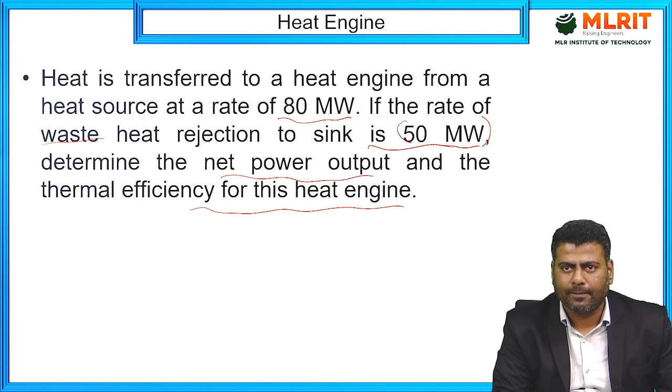In that, 50 megawatt is rejected as waste energy. These all come under losses. Since the losses are mentioned, I can easily calculate the efficiency also. So it's a very simple numerical problem. We know how this heat engine works. This is a hot source and we have the sink. QH is given as 80 megawatt. From this 80 megawatt, how much energy gets wasted? 50 megawatt gets wasted.

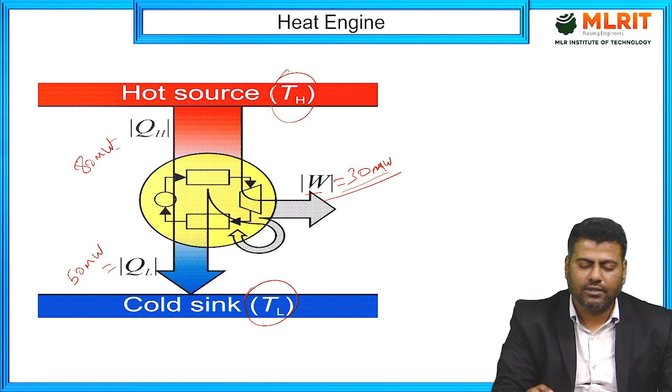So obviously the work done is QH minus QC or QL, right? So we have 80 minus 50, 30 megawatt only. We have converted that into useful mechanical work. The remaining is considered waste energy, transferred to the sink. So the net work output is 30 megawatt, as we have calculated.

We know that the net power output is the difference between the heat input and the heat rejected for the cyclic device. W net output is QH minus QL. So 80 minus 50, we got 30 megawatt. Similarly, how to calculate the thermal efficiency? The thermal efficiency is always the net work output by input.

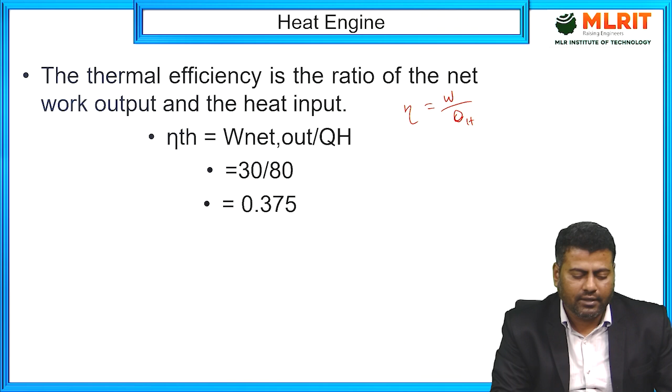So what's the output we have? We got 30 megawatt as the work output, and the input is 80 megawatt. So 30 by 80 gives 0.375, or 37.5 percent is the efficiency of the given heat engine. If the heat engine rejects 50 megawatt with a supply of 80 megawatt, I get 37.5 percent efficiency. This is the thermal efficiency we got. 37.5 percent is an achievable one, right?

To compare whether we can achieve this or not, we have the ideal conditions also, which later classes will discuss. In the upcoming lecture, we'll discuss the Carnot cycle. That is the comparison we require with respect to the ideal and actual cases. So these are the assumptions I said, right?

We are not having any of the data with us. So 80 megawatt I have supplied and 50 megawatt I have rejected as heat, right? So with that, with the given source temperature and sink temperature, is it possible or not? Like that, we are supposed to calculate, right? Yes, this is about the heat engine problem.

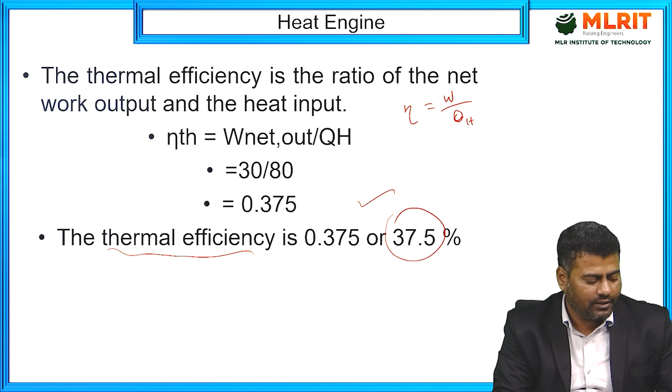Next, we'll discuss the refrigerator problem. The problem given is: the food compartment of a refrigerator is maintained at 4 degrees Celsius by removing heat from it at a rate of 360 kilojoule per minute. If the required power input to the refrigerator is 2 kilowatt, determine the coefficient of performance of the refrigerator as well as the rate of heat rejection to the room that houses the refrigerator.

See, I need to maintain the food compartment. There is a freezer space they have provided. That food compartment in a refrigerator I am supposed to maintain at 4 degrees Celsius by removing some heat from it. So heat is removed from the 4 degrees Celsius. So for this refrigerator, the 4 degrees Celsius is nothing but a source. How is it removing? By the expenditure of 2 kilowatt.

See, here they have given kilojoule per minute. We can convert that in terms of kilowatt also. 1 watt is nothing but 1 joule per second, right? So per minute we are having 60 seconds. So with that I can get how much kilowatt it is converted. So that's just a unit conversion.

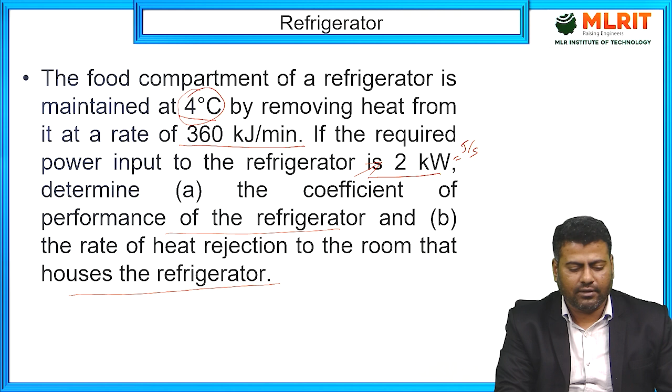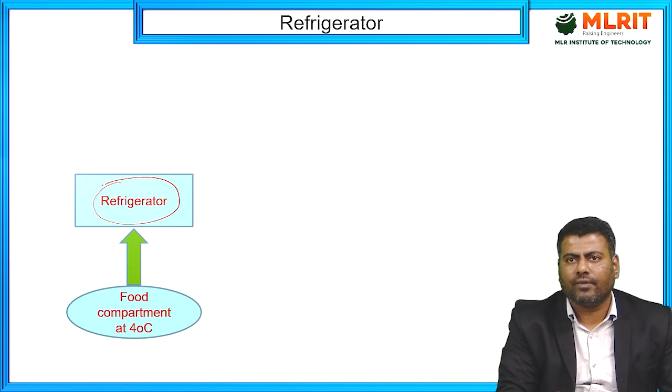We are supposed to calculate the COP and the rate of heat rejection to the room that houses the refrigerator. Heat rejection to the room means we are supposed to calculate QH. How to solve the problem? The refrigerator is working under a cyclic process, and it has the food compartment we need to maintain at 4 degrees Celsius, and that heat is sent to the warm surroundings.

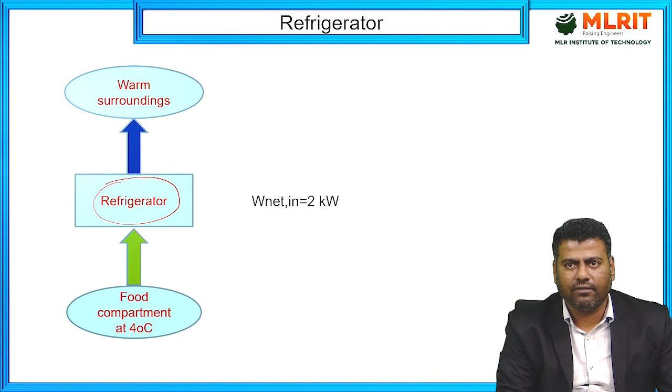See, this is how much work input we have given. Input is 2 kilowatt. And what about QL? QL is the heat energy we are absorbing from the food compartment through this refrigerator device. With that we can remove 360 kilojoule per minute. We can convert that in terms of joule per second also.

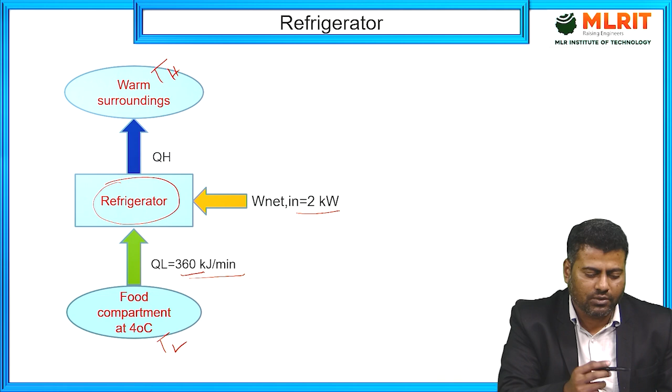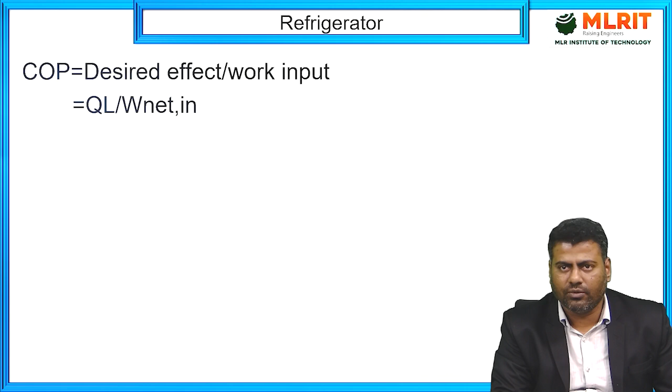Okay, now see, this is TH, and this is TL, low temperature. TH is always the source. So QH is the heat transfer with respect to the source. We are supposed to calculate QH also. See, COP is the desired effect by work input. Which is the desired effect? QL, right? QL is 360 divided by 60.

So we'll get 6 kilowatt. 360 divided by 60 gives 6 kilowatt. So 6 divided by the work input we have provided, 2 kilowatt. Kilowatt gets cancelled. We have 6 by 2, we'll get 3. So the COP of this particular refrigerator is 3.

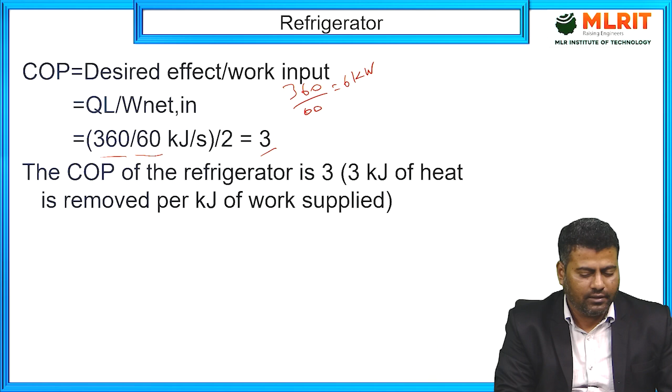The COP of the refrigerator is 3, and 3 kilojoule of heat is removed per kilojoule of work supplied. Then the rate of heat rejection can be obtained by applying the first law of thermodynamics, the energy conservation. So QH equals QL plus W net in. QL we already calculated as 6 kilowatt, plus 2 kilowatt.

So the overall heat rejected from the refrigerator to the surroundings, how much did we get? 8 kilowatt. So in this way we need to solve numerical problems on heat engines as well as refrigerators or heat pumps. This is applicable to the heat pump also. Instead of QL, we are supposed to consider QH. Then it becomes a heat pump problem.